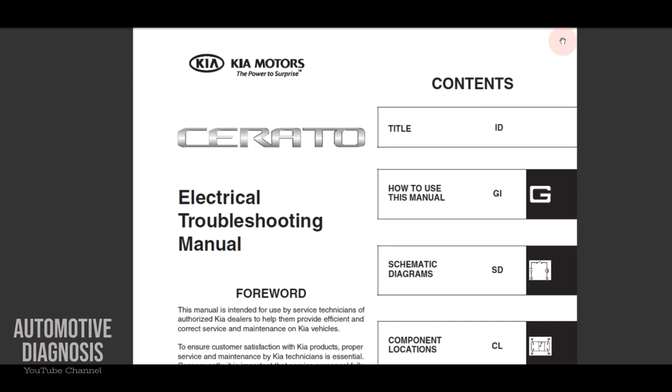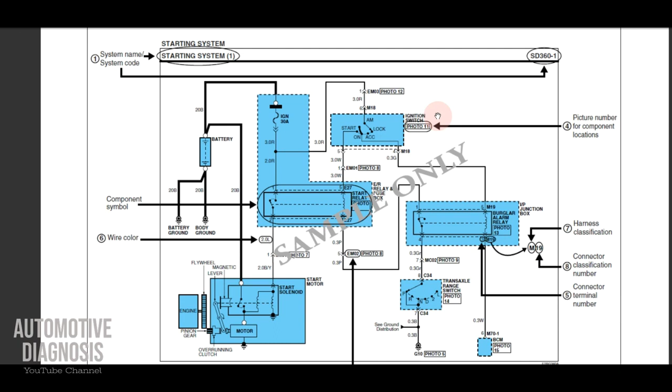Okay, let's start. For this PDF file, I have all the systems together. At the beginning, I have some introduction, a really quick introduction for reading the wiring diagram. I will explain everything later in another wiring diagram, because here there's too much information - it's really hard to explain.

If you go forward, you have some other information for some symbols in the wiring as well. But let's start just talking about the wiring on a real wiring diagram for one system.

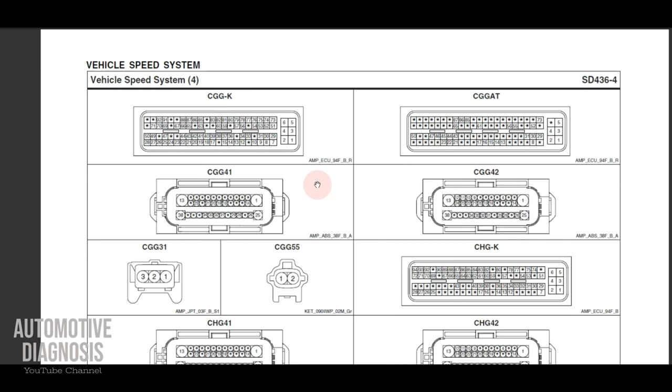For example, for the starting system. Obviously if I go to other pages, I have other wiring, like for the charging system, for vehicle speed, automatic transmission - all of them are in this PDF file. But if I start from the starting system, because it's more familiar for you guys, it's easier to understand.

So, heaps of information here as well. You see at the very first page, you have starting system page one. Number one shows you that you don't have only one page for this starting system - you may have different pages as well: page 2, page 3, page 4.

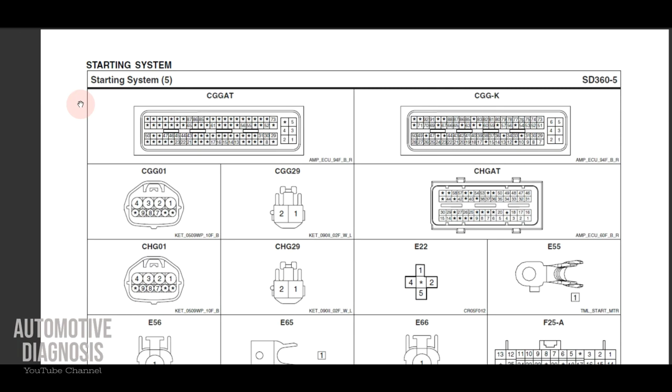And the reason I'm explaining this is because sometimes you download the file from a website, you just get one page, and that page is not applicable to your car. Like this starting system is for the G4FC Gamma engine, 1.6 liter, without button start.

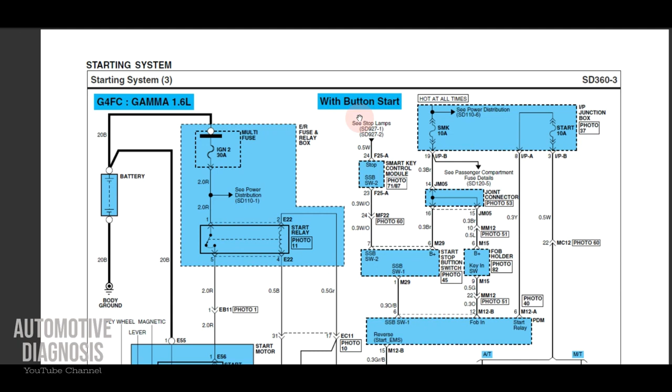So this one is applicable for this car without smart key system or button start. But if you go to the next page, that one is for the Theta 2, 2-liter engine, and page 3 is for the 1.6 liter engine with button start. So you see, you have different pages for a starting system depending on the engine type, or when you have different options like button start on the car.

That's why you've got to be careful when looking at the wiring diagram - you want to make sure it's exactly applicable to your car, otherwise you may get wrong information. So let me zoom out this a little bit so everyone can see.

So on this wiring diagram, first of all we have a couple of boxes shown here. All of these boxes are actually the components involved in the starting system. On the left I have the battery, the ER fuse and relay box, ER meaning engine room fuse and relay box. I'll explain this because we may have different naming on Kia and Hyundai for fuse and relay boxes. This is the ignition switch, IP junction box for the interior fuse box. Again, I have ER fuse and relay box here as well. This is the starter, ignition lock switch, and transaxle range switch.

So the first step for reading the wiring diagram is obviously to identify the components. If you don't identify the components, it's going to be really hard, maybe confusing as well. So identify the components first, then you can start finding the connections between them to get more information.

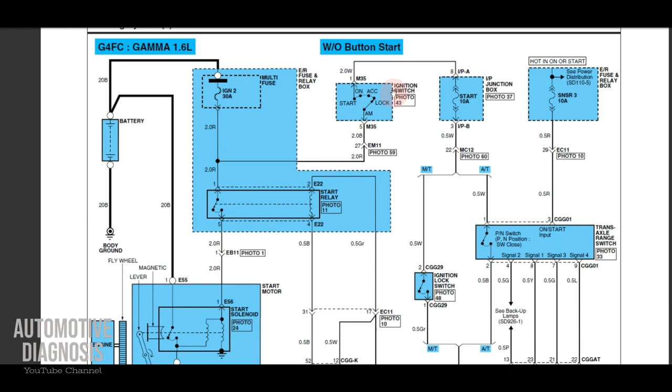So now we know the component's names because the first thing we did was identifying the components. There is something really important next to each component, which is the photo number. So like for this one I have ignition switch photo 43, 37 here for IP junction box.

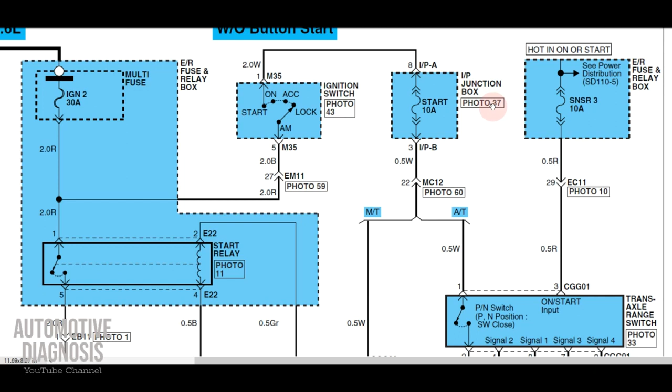And even for some connectors in between I have the photo number. So this photo is referring to the component location. So if you're looking for the IP junction box, if you have this PDF file with all the other files together in one file, you just need to go to the very last pages where you can see all the component locations, and they are exactly in sequence by number. You can find just the page number, photo number 37, to find it out.

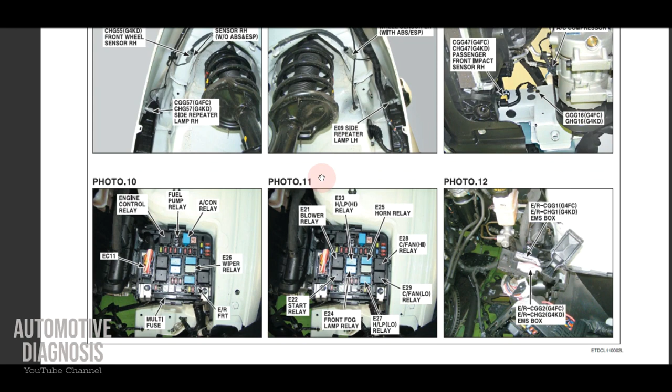Let me find it for you right now. Okay, this is the component location. So you may have this in one file, in this file, or in a separate file. So if files are separate, you just need to download the component location file as well. And we are looking for photo number 37. See, all the photos are numbered here, and you have real photos taken from the car. I find 37 - there you go.

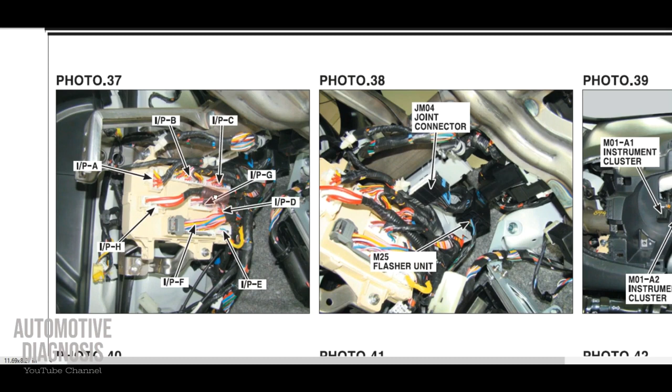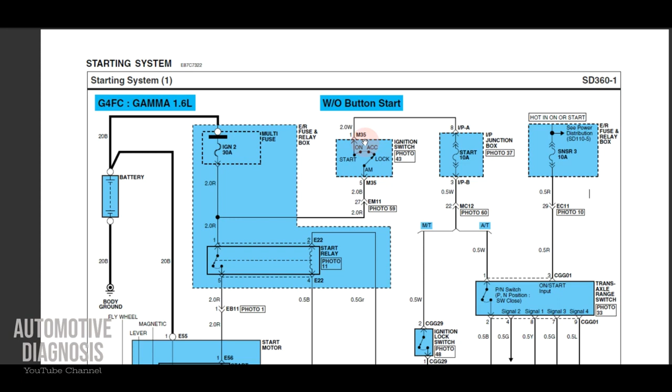So as you see, photo number 37 is referring to the IP junction box, which is the interior fuse box. And you see all the connector naming and locations as well, which I will talk about later. So you have all the other photos as well, taken from the car, which will help you locate the components. If you're just looking for the component location here and there, you can find it in the wiring diagram. But obviously if you use the online wiring diagram or the GDS, it's going to be a bit different. I will show you later how to do that.

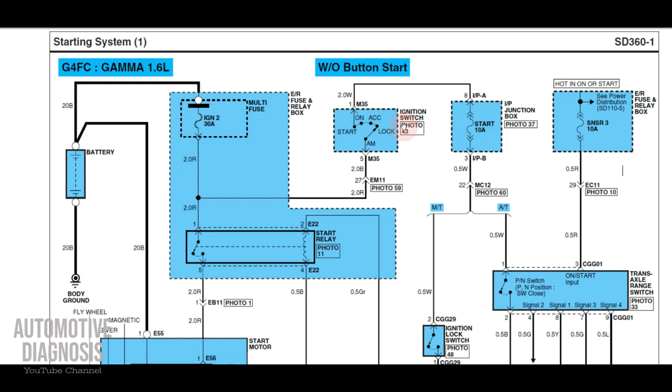Between any of these components, I have the wiring. You see this wiring between IPA and between IP junction box and ignition switch. So for example, if you are diagnosing a car on the starting system and the car doesn't crank at all, you are checking this fuse here, start fuse in IP junction box, and you see that you don't have any power on this fuse.

So this is the ignition switch. When you start, this switch will change position from lock to start, and it will pass the power from this ignition fuse, 30 amp, through this wire all the way to the ignition switch. Because the ignition switch is already turned to start position to crank the engine, this power will go all the way to the IP junction box, to this fuse. So if you see the car not cranking and you check this fuse and there is no power, it could be from anything before this.

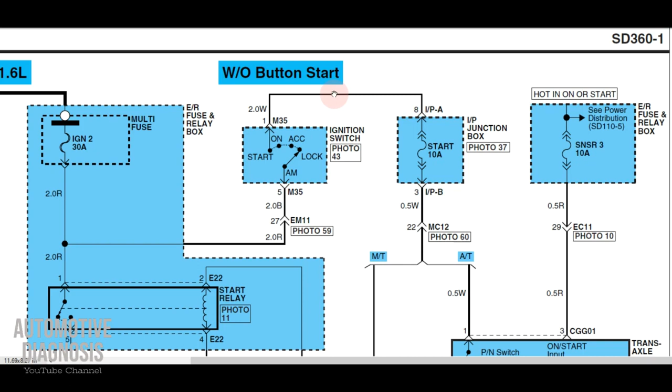If you think you need to check this wire, trying to find checkpoints to check the wiring point by point, there are some steps that I will explain if I zoom in.

So for finding any single wire in the car, first I need to know the color of that wire. Any wire will be connected to one connector. I need the connector code and connector location, and inside that connector, that wire will be connected to a specific pin, so I need the pin number as well. I need the wire color, the connector code and location, because connector code itself is not enough, and I need the pin number inside that connector. So if I have all these, I can find my wire and both ends of that wire.

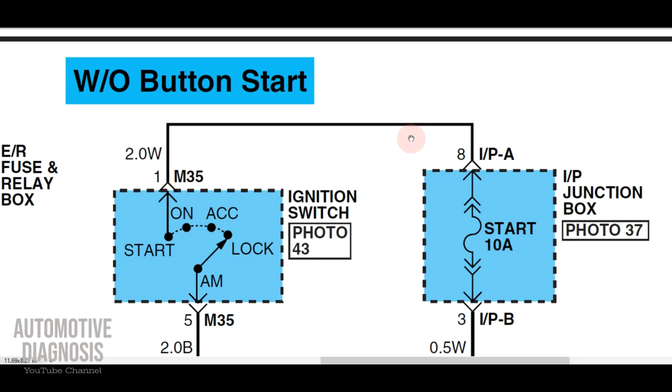So for this one, you see W here, referring to white, so apparently this wire is white. For any other wire, I have a color code next to it: B for black, R for red, W for white again. What are the color codes?

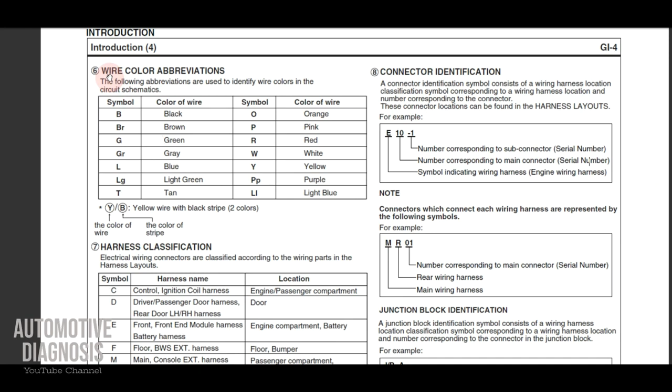If I go to the very first pages, this is the wire color abbreviations or color codes. For Hyundai and Kia, we have this code for these colors: B for black, BR for brown, G for green, GR for gray. We have all these, so you can have a look. If you have O, it's for orange.

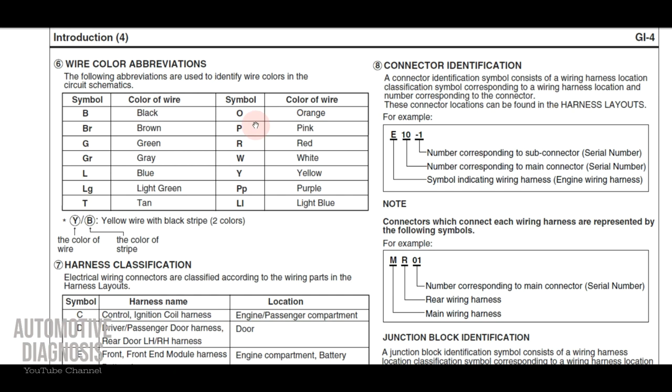So if we have just one single color on the wire, but if you have something like Y/B, the first one is the color of the wire, and the second one is the color of the stripe. So it means we have two colors on the wire: the main color is yellow, and the stripe on the wire is black, the second one.

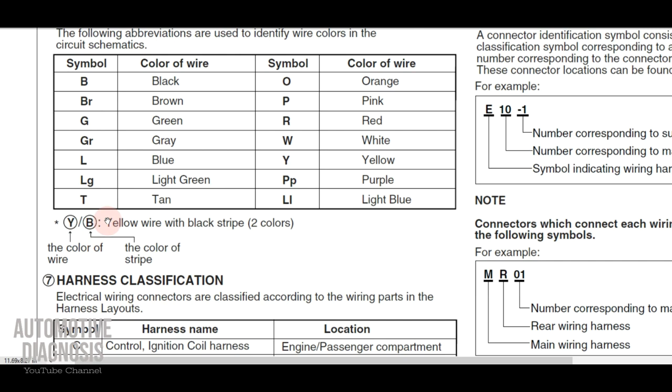Okay, let's go back to the wiring. So for this wire that we are after, to find it inside the car, we know that this wire is already white. What else? This wire is connected to the ignition switch from one side and the IP junction box from the other side.

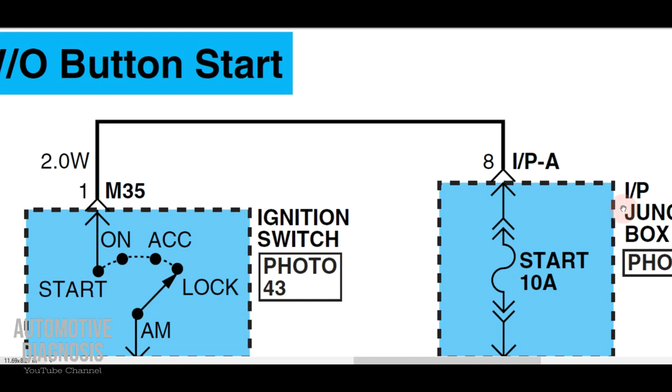So you want to find the connectors. For the IP junction box, we have the location here. This is the one I showed you, photo 37 at the very last pages, on the component location file. We know that this wire is inside the connector IPA, pin number 8. This is the pin number, the one on the left. What you have on the right is the connector code.

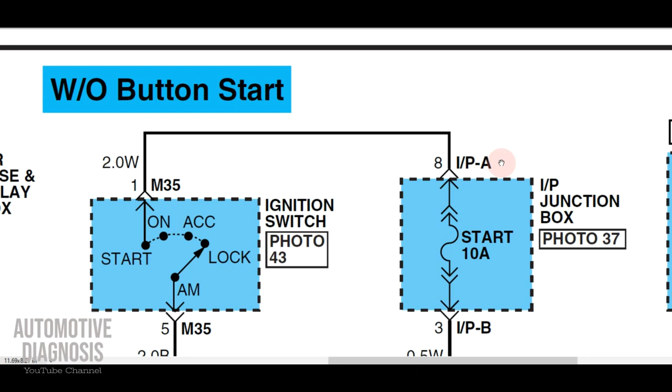So which one is IPA? If you check the IP junction box, you have several connectors, so it's really confusing if you don't know the connector location. I'll go to the very last page again to show you IPA. This is page 233, component location photo 37, and you see how many connectors we have on the IP junction box. This is IPA, so this is the one we are after.

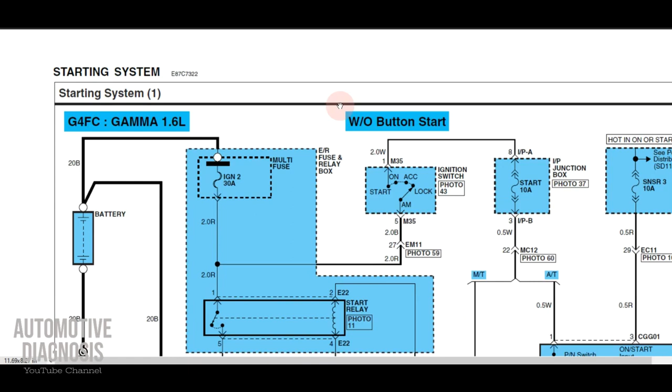So we are looking for a white wire inside this connector, at pin number 8. How can we find some more information about the connector itself? We already found the connector location, but we need to find the pin number as well. How can we find more information about the connector? Let's see what we can find.

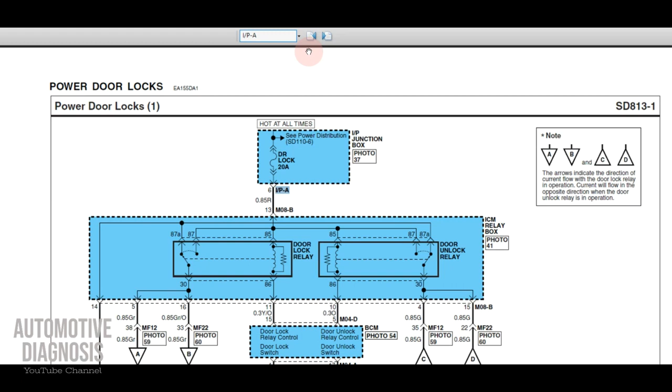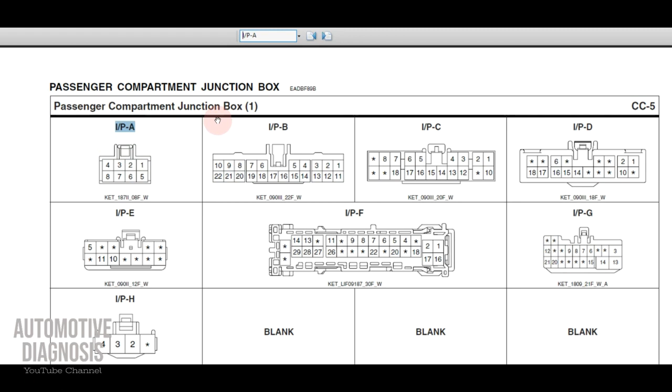Okay, I just found it. IPA, passenger compartment junction box. This is the IPA. We are looking for pin number 8, which is this one. So we have some more information here as well, like the one that we have down here.

The first two sections are not really useful. The second two sections are. So on the second section, if we check, 08 shows the pin numbers, how many pins we have inside the connector. It's more than obvious that we have 8. F stands for female, so we know that this connector is the female connector.

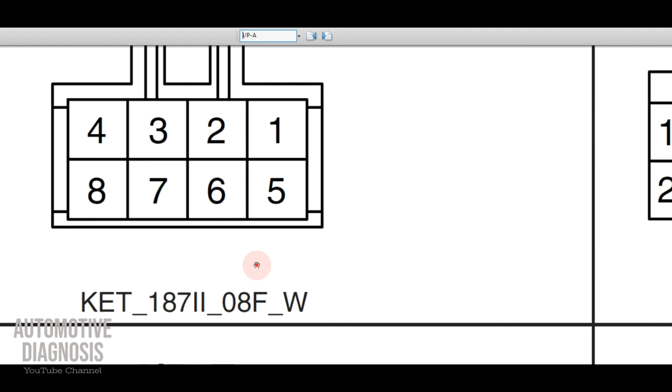If we have male here, it shows male connector. So M stands for male, F stands for female. If we have F, means our connector is female. If we have M, means the connector that we are after is male. And the other one, W at the end, refers to the connector color, so we know that the connector we are after is actually white.

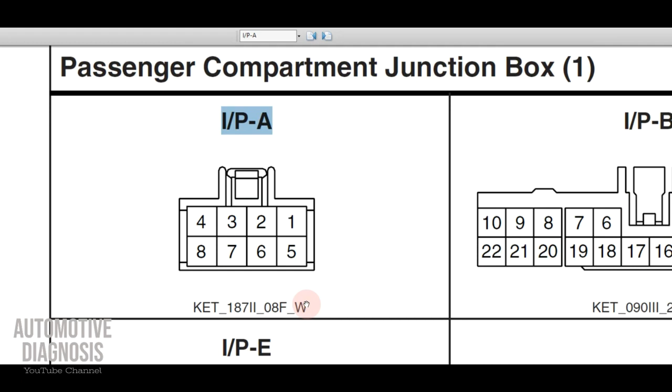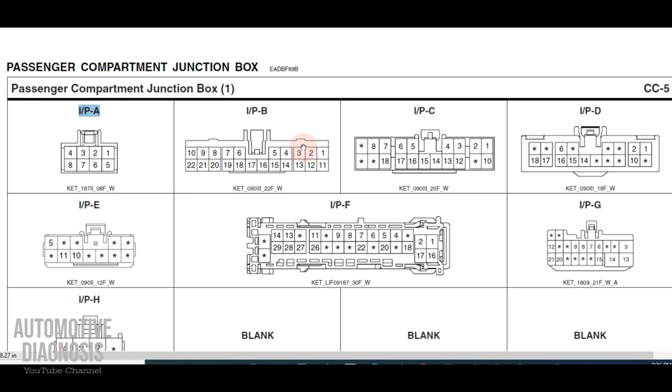Instead of searching, you can find the connector in another way as well. You see all the connectors are listed here. We have connector configurations as well. If you have the whole PDF file, you can search it, or you can just find this section, connector configurations. But if you have separate files, you need to download the connector configurations as well to find the details for the connector that you are after.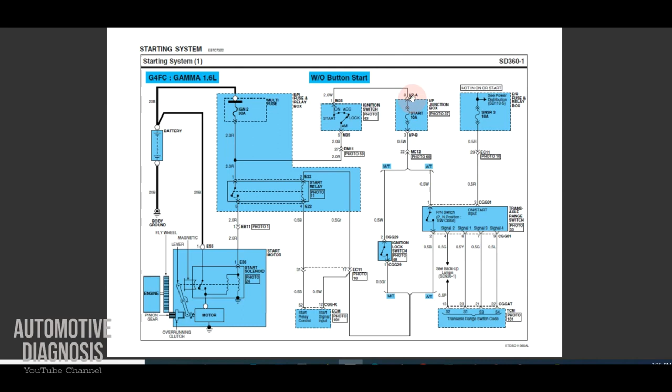So we already found the connector code, we already found the connector location, we know the pin number, we have the wire color as well. It's super easy to find the wire that we are after, right? Perfect.

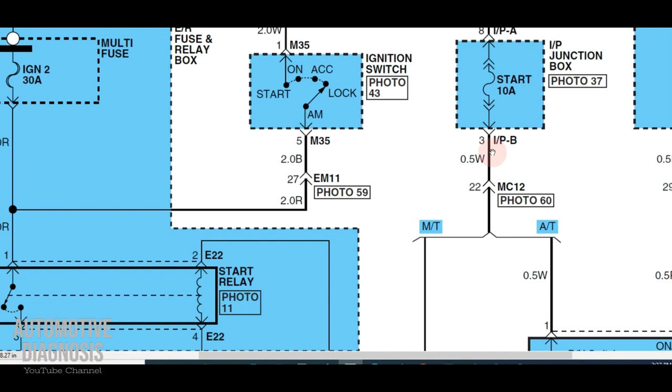Sometimes we have some other sections on the wires. For example, for this wire, you see this wire is connected to I/P junction box connector IPB, but actually at the middle there is another connector here as well. So it means this wire is not connected directly to the IPB, there is another connector as well.

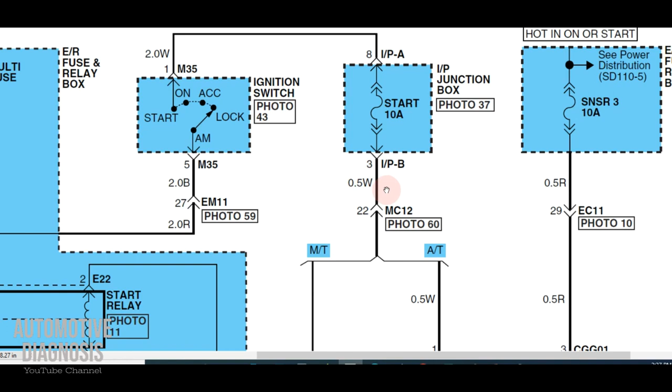So for this one, obviously the same story. You can find the connector, but this code MC12 is referring to the connector location for this one, and 22 is the pin number, and the color of the wire is white as well. Okay, perfect. So what else do we have?

First of all, some more general information. For any boxes, for any sections, for any parts you see in the wiring which are provided with these broken lines, it means that you don't see the whole section of this component. Like for the fuse and relay box, you just see the section relevant for the starting system. Like for the ignition switch, I/P junction box, when you have the broken line, it means you just see a specific section of that component relevant to the system you are looking at.

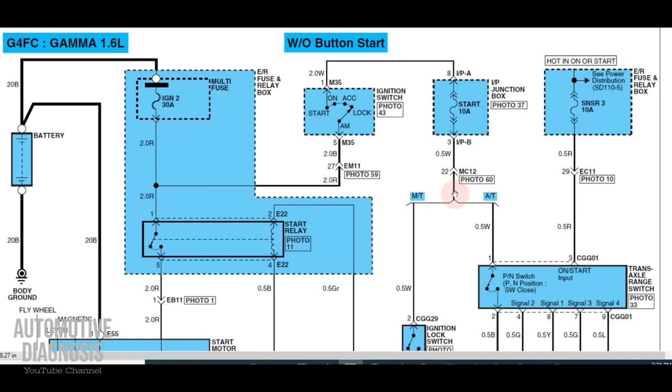But something like the starter, when you see a solid line like this, it means everything for the starting system is shown here, so you don't have anything else. All the electrical sections, pins, wiring for the starter is shown here. This is the difference.

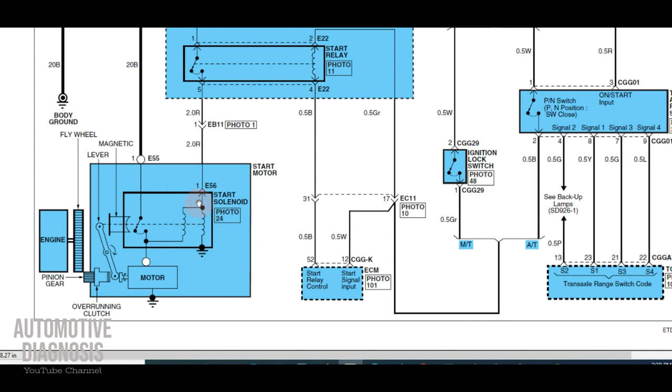If you have any relay for that system, you will see those sections as well. This sign is for the fuses, you see the fuse amp range as well. You will have some sections in the wiring diagram specifically for the engine and interior fuse box as well, so you have all the details for them too.

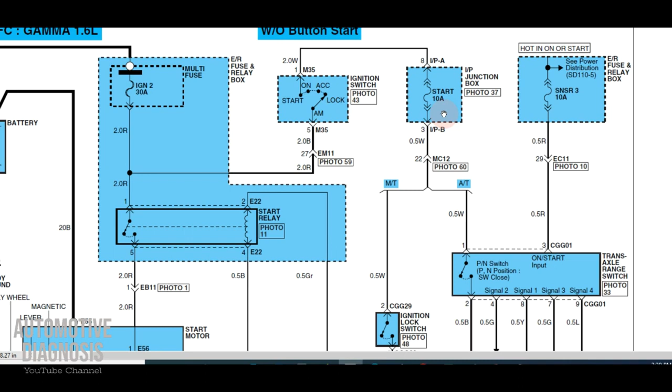There is something sometimes at the top, right before the fuses, because this is the sensor 3, 10 amp fuse, but you have something written at the top: hot in on, or start. This shows in what circumstance this fuse will receive the power, because sometimes you have a fuse, when you turn the ignition off, that fuse doesn't receive any power anymore. If you don't know that, it's going to be confusing when you are checking the fuses.

So for this fuse, when you turn the ignition off, you won't have any power on this fuse anymore, because when we say hot in, on, or start, it means this fuse will receive power from the battery or charging system only when the ignition switch is in the on or start position. In any other circumstance, like when the ignition switch is on accessories (ACC), or when the ignition switch is completely off, this fuse will not have any power.

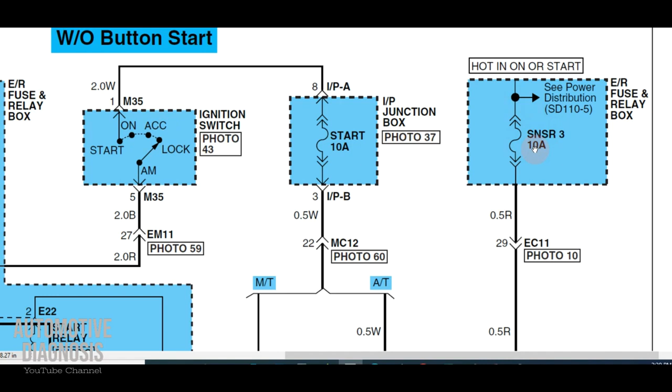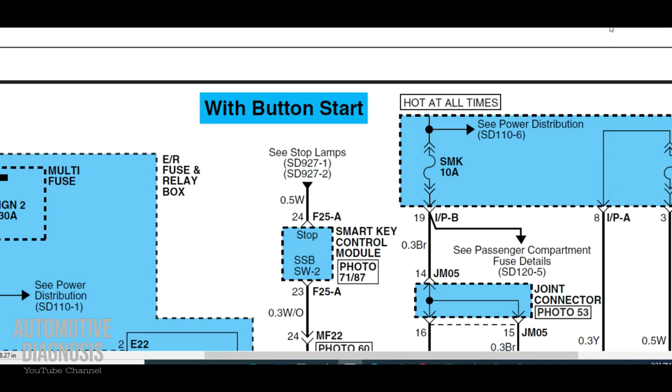Okay, let's go back to our page.

But technically, how can I read the wiring diagram? Because what I've done so far is just to identify the components, find the wire color, pin location, pin numbers, connector location, connector numbers, and all sorts of things like this. But what I normally do for reading the wire diagram is just to find the starting points, because if you don't have any start point, it's going to be really confusing for you guys to read the wire diagram.

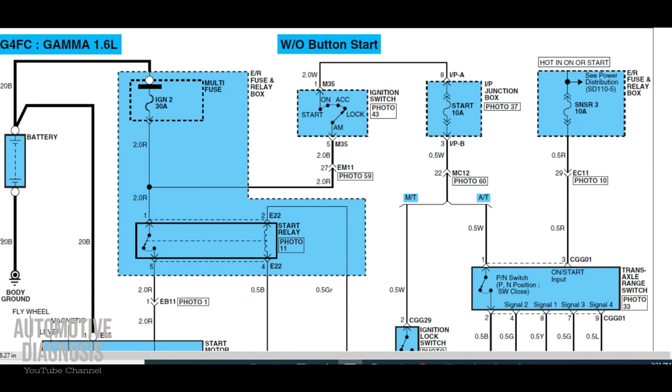So what you need to do is find a starting point. For example, for a starting system, the starting point for this system is the ignition switch, where you start the car and crank it. So you will start from there. Just imagine that this is the ignition switch.

Start from the ignition switch and turn it, just because the wiring diagram you see is when this system is not working. So you need to start thinking about how this wiring and this system will work if you activate it. So try to think, if I turn the ignition switch to start to crank the car, what will happen?

The first thing which is going to happen is this fuse, which already provided the power from the battery to this wiring, is going to provide the power to this line as well. And as soon as you turn the ignition switch to start position, this power is going to travel all the way from here, from this white wire to I/P junction box to start fuse.

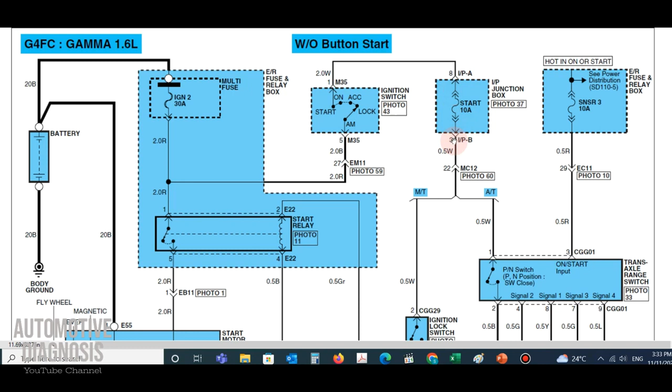And if the start fuse is okay, this battery power is going to travel all the way from IPB pin number 3 through another wire color. It goes to connector MC12 pin number 22, which is located here in photo 60, and it will reach this position. But here we have two different sections.

If your car is equipped with manual transmission, you need to continue reading the wiring diagram from here. But if your car is equipped with automatic transmission, you need to continue from here. This is AT, stands for automatic transmission. So if you have automatic transmission, continue reading the wiring diagram from this section.

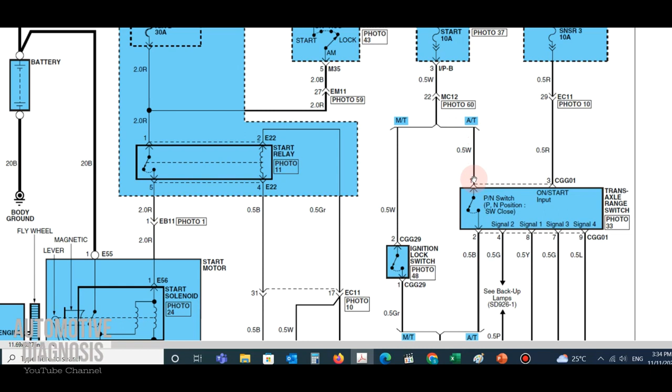Go all the way down. You reach this component, which is the transaxle range switch, or sometimes it's called the inhibitor switch. So you see the inhibitor switch.

This battery power is going to go through the inhibitor switch, and obviously the only time you are able to start the car, to crank the car, is when the transmission is located on park or neutral position. And you see that PN switch. So it means if your transmission is on drive or reverse, you won't be able to start the car.

And sometimes this transaxle switch is out of adjustment, so you need to adjust it or replace it if it doesn't let the power go through, even if the transmission is on the park or neutral position.

But if it's okay and the transmission is on park or neutral position, this battery power is going to travel all the way from here, back to this wire, and it will go up from this gray wire all the way to the starter relay.

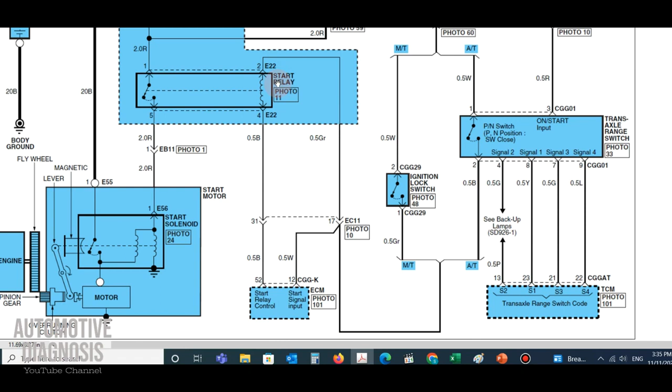Okay, so I have the starter relay here. If you guys know about relays, that's okay. Otherwise, I will make another video for actually showing you guys how to check different relays. But for this starter relay, you see the internal structure is provided as well, to make it easier for everyone to understand.

For any relay, we have a coil and a switch side. For the coil, to activate the relay, we need the battery positive and negative. So positive is already provided from here, from the wire we were chasing, and the other side should be connected to the negative. On this car, if we continue the wire, it's connected to ECM, the engine control module, and you see a start relay control.

It means the ECM is responsible to provide the negative to control and activate the starter relay. And you may notice there is another line from this positive to the ECM. This is actually a kind of feedback, a kind of input to the ECM.

When you start the car, right before providing the power to the starter relay, there is another wire actually providing this power to the ECM as well, just to show the ECM that a start relay must be activated. So the ECM, after getting this signal, will provide the negative as well to activate the starter relay.

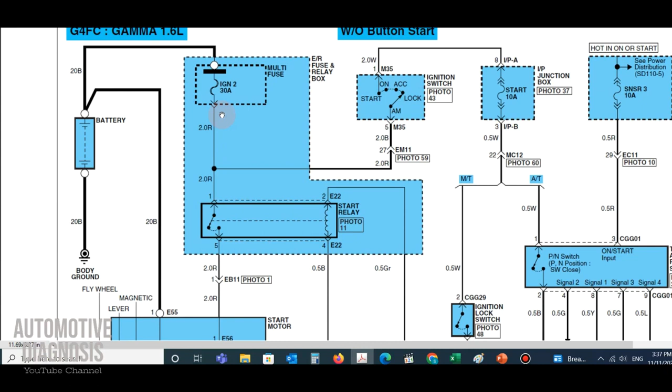When the relay switch is closed, power from this relay will travel all the way down from this red wire to the starter solenoid. This is the starter solenoid, and the reason the starter solenoid is much bigger than the starter motor in this wiring diagram is...

...they just wanted to show the detail of the starter solenoid here. It doesn't mean that the starter solenoid is bigger on the real starter, they just wanted to show the details.

As you see, this power will go through the starter solenoid on pulling and holding winding inside the solenoid to actually activate the starter, to pull in the plunger and activate the starter.

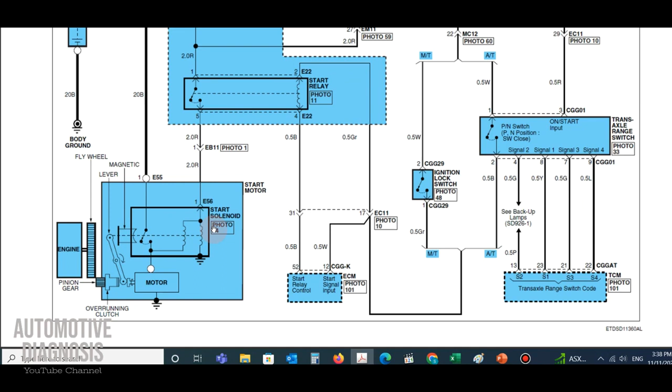The last section for explaining the starting system was to show you how we can get information from it, because anytime the car doesn't crank, you need to find some points to troubleshoot. For example, if you can't crank the car, you can check the starter relay, remove and check it, or just put your finger on it. If it's clicking, that gives you some idea.

But what I do normally, if the car doesn't crank and I think it's from the starter relay, because when I start it I don't hear the relay clicking, I will swap the starter relay with another identical relay as a quick fix. If it works, certainly it's from the starter relay.

Otherwise, I check the power supply on this pin, because the power has to travel all the way from the ignition switch, this fuse, the inhibitor switch, and back through all this wiring to here. So when I turn the ignition to start position, I ask someone to start the car, and I check the power here, the positive. If I do have battery voltage here...

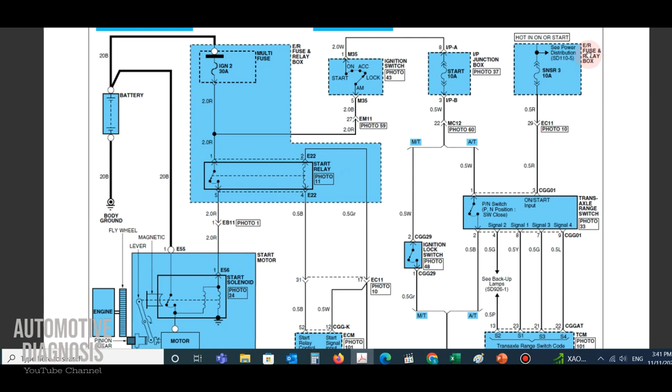Let's have a look at the wiring when you are using the GDS or the online website. This is the online website. If you are using GDS or the Kia and Hyundai original scan tool, you have exactly the same wiring diagrams.

It's exactly the same as the PDF file, but you have some more access. Some other things are much easier to be found, like the component name, component location, everything like that. But do you remember the connector code?

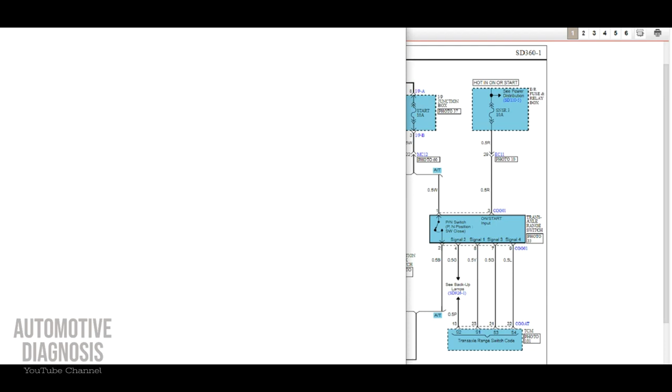For finding locations, you don't need to go to the component location, because we use the I/P junction box location to find I/P-A, remember? But now, if I stay on the I/P-A, I have a link here. Something is linked. If I click on the I/P-A, I have the connector detail, including the code down there.

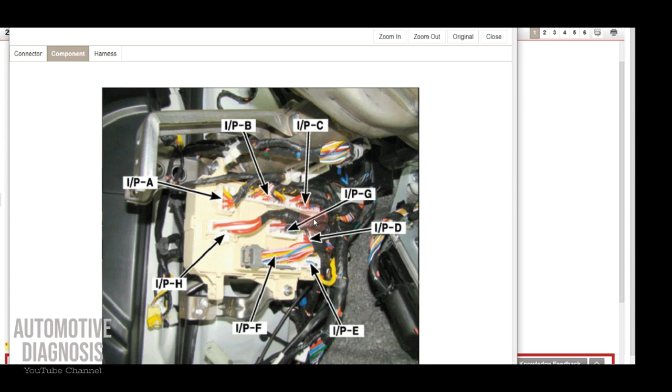If I click on the component, I see the component location. This is the I/P-A and all others, and even the harness. I can look for the I/P-A, which is this one, in the wiring harness.

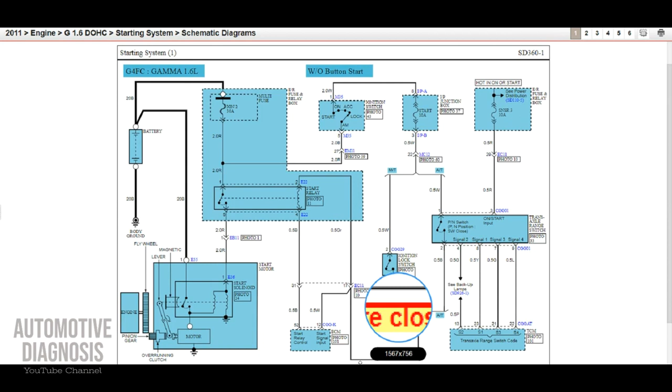So this is the easiest thing about using the GDS, but everything else is completely the same. So if you don't have the GDS, take it easy, just look for the PDF file. It's exactly the same. You can use it for troubleshooting.

I hope you guys enjoyed this video. I'll try to make some other videos to show you how to read the wiring diagram for other cars, and I'll try to make it specific for other systems as well, how to read wiring diagrams for systems like the starting system, the smart key system, engine control module, and transmission. Hopefully it's going to be helpful for you guys as well.